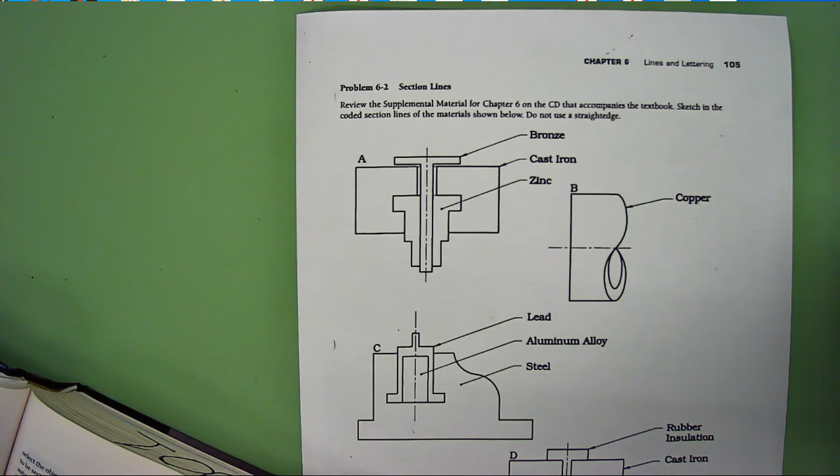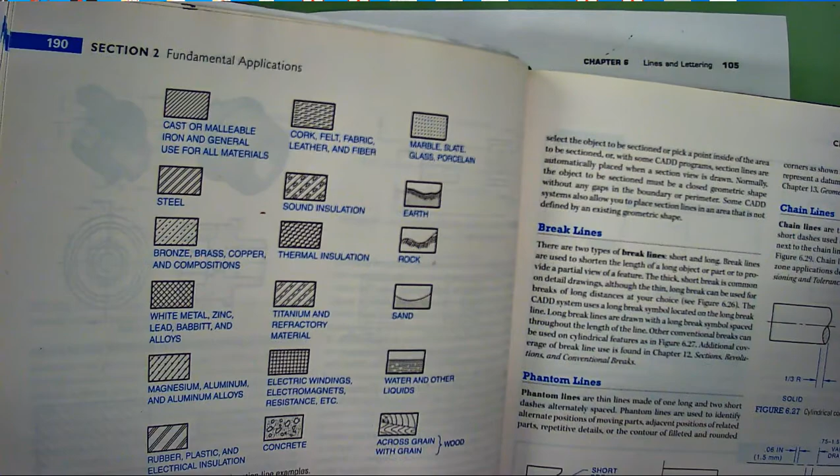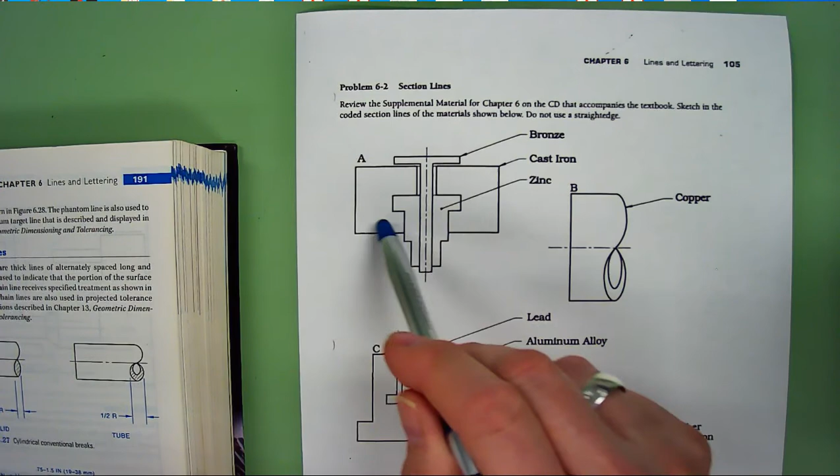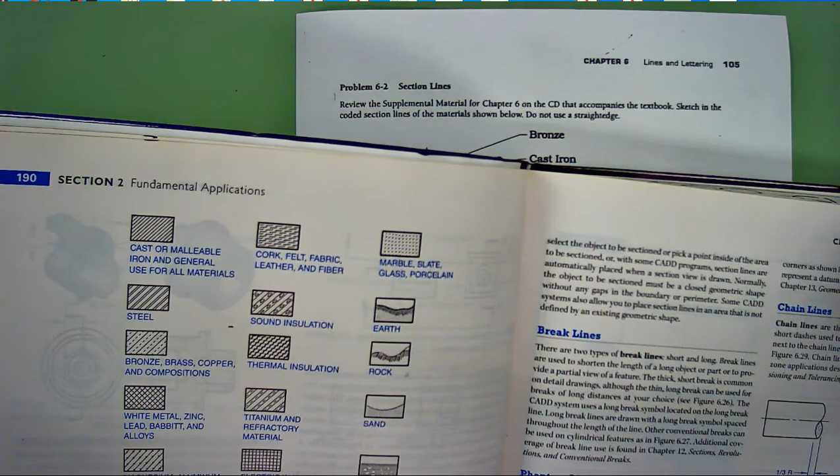Some have been confused. In the book, on page 190, here are your various types of hatching. The plan is for you guys to draw the specific hatches, like cast iron. See this area here, and this area right here, that's cast iron. So it should look like this very top one right there: cast or malleable iron, used for general use for all materials.

I'm going to keep this book handy, but I'm also going to show you the tools that you should be using for this.

Everyone should have a box of drawing tools, and for this assignment we are going to need your triangles. I'm going to set them up here for right now. We do have some spare pencils in here. This one's a 0.9, so that's pretty big, and this one is a 0.5. I'm going to use the 0.5.

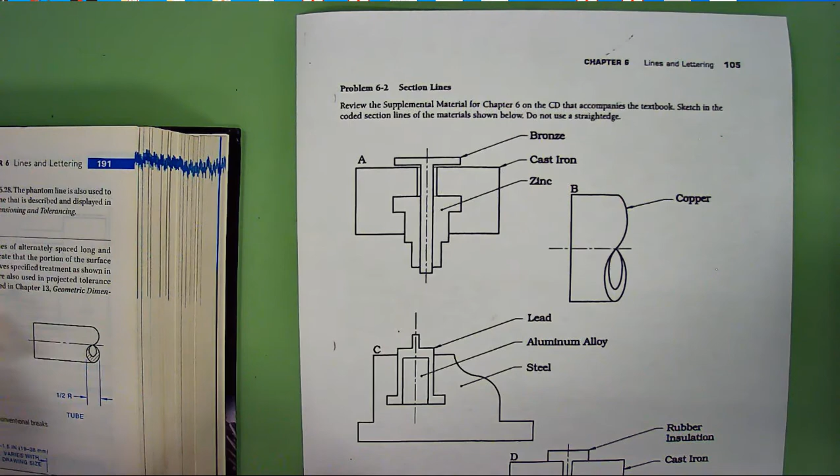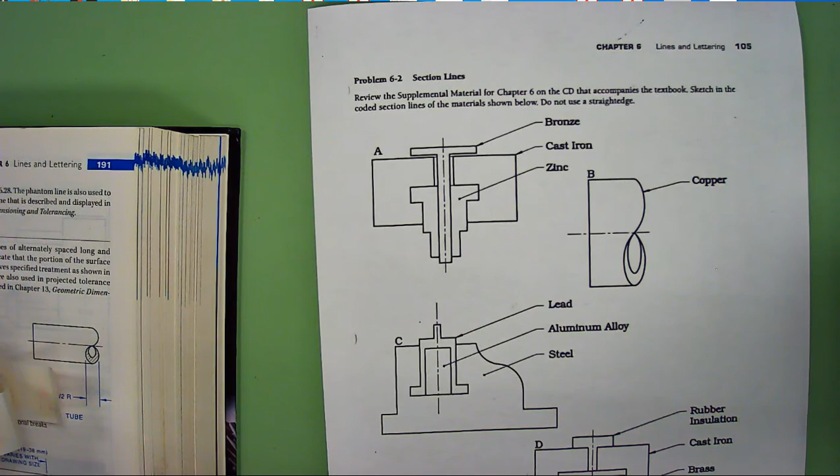I'm going to set this back up here. Actually, I'll set that over here so it's not in the way. Then I'm going to tack my paper down so I don't accidentally move it. Let me try to get it square with the screen, because it's not square on my desk. That's okay.

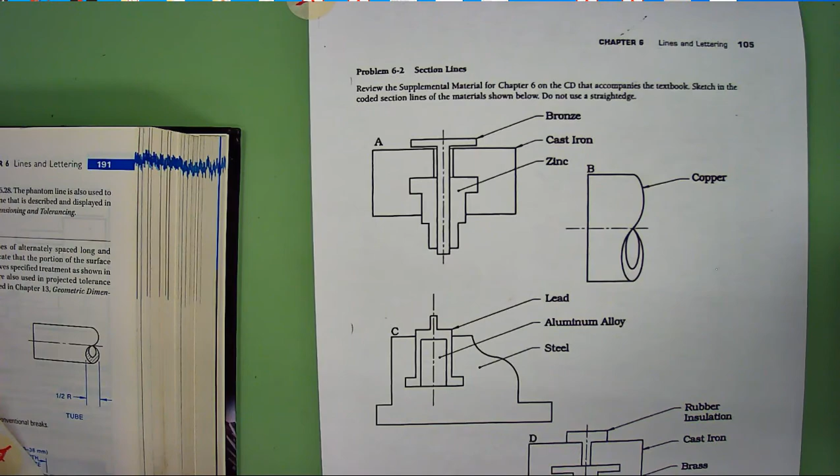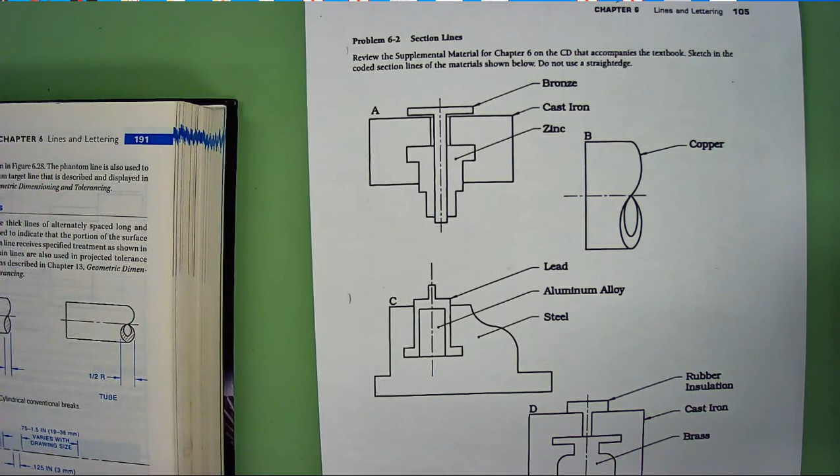So this is how your paper should be taped down, which you can't see either one of them. I'm going to move this for just a second. See, I got the corner done up there, and then way down yonder is the other one. The plan is to have it at all corners, but since this is just a demonstration, I'll put the book over here.

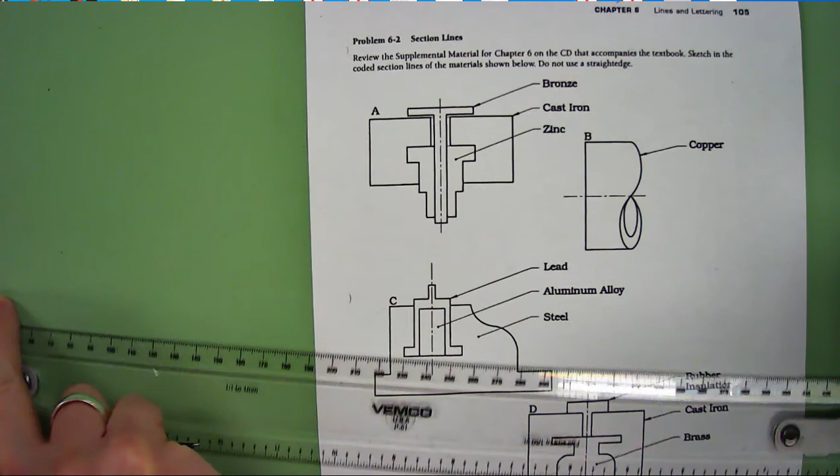Some of you probably have T-squares. This right here is a drafting machine. I'm going to level it up with the paper. That's close enough for government work.

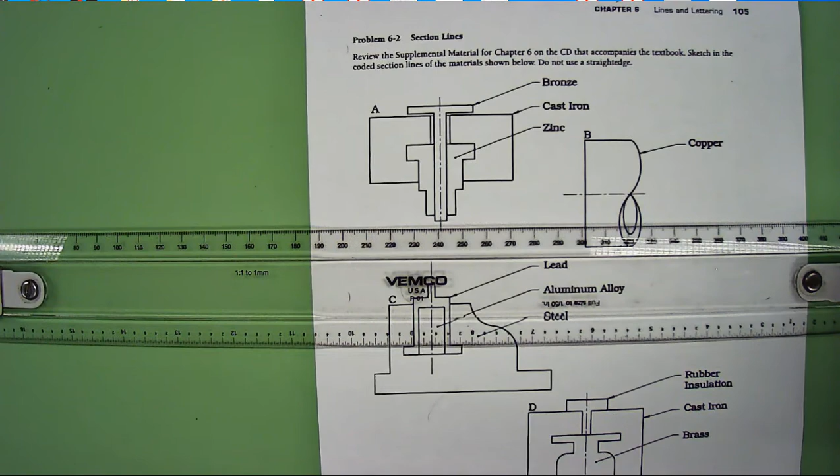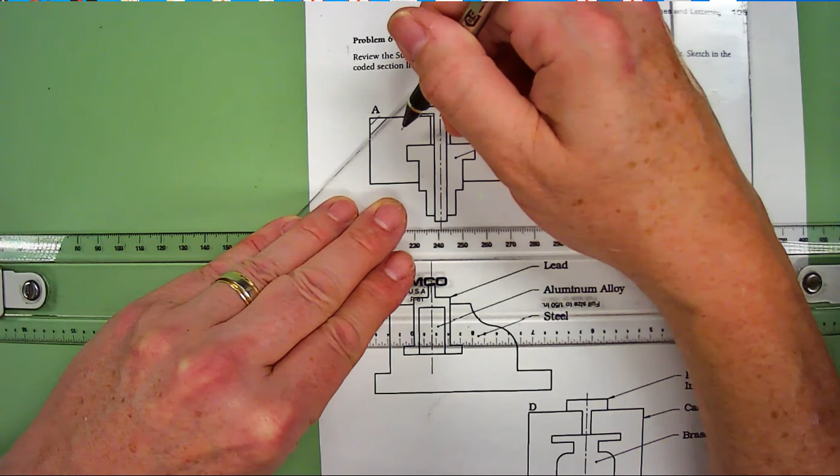Now, our cast iron lines are at a 45-degree angle, so I'm going to make lines. My head is usually closer to the hatching, but then I'd be hitting the camera.

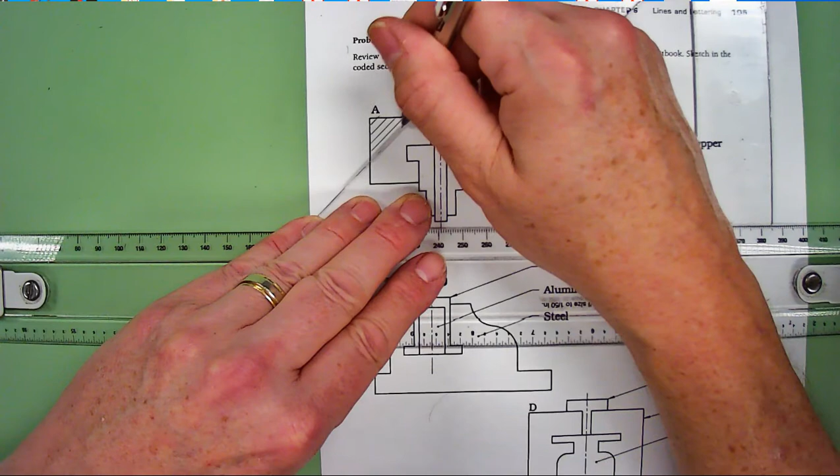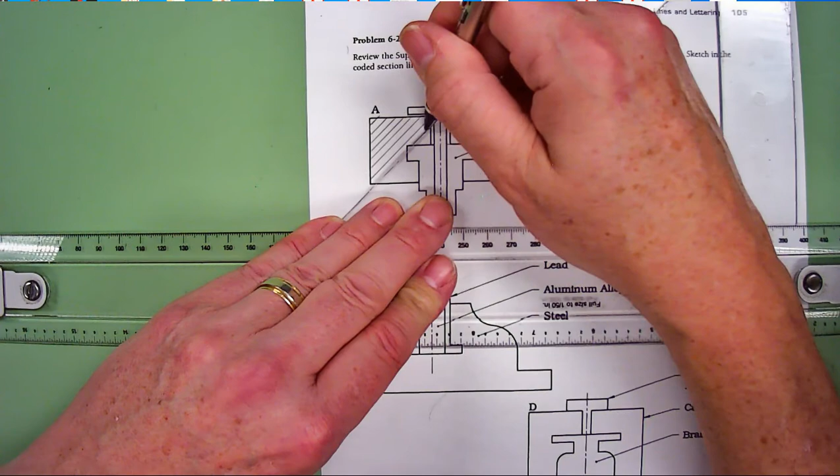And this is how hatching is done. Now, in a perfect world, I would have measured and made some starting lines. Oops, I let that get away from me.

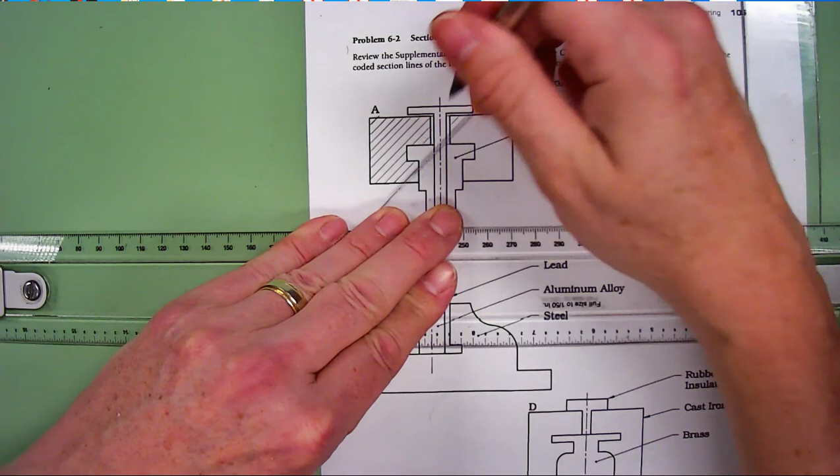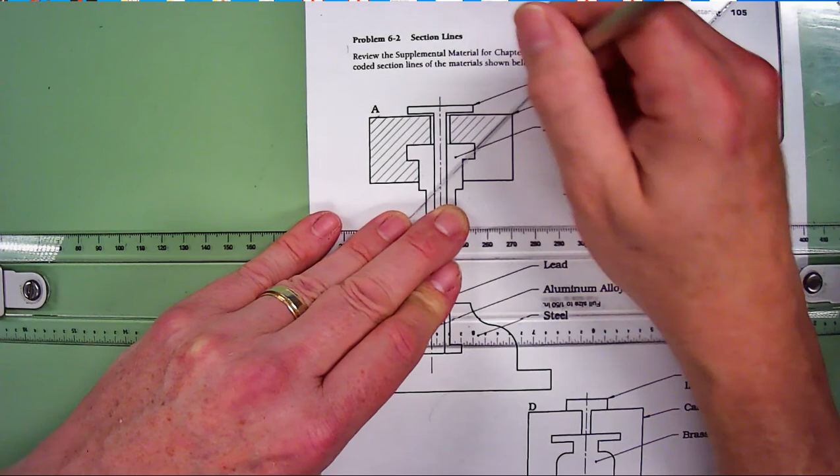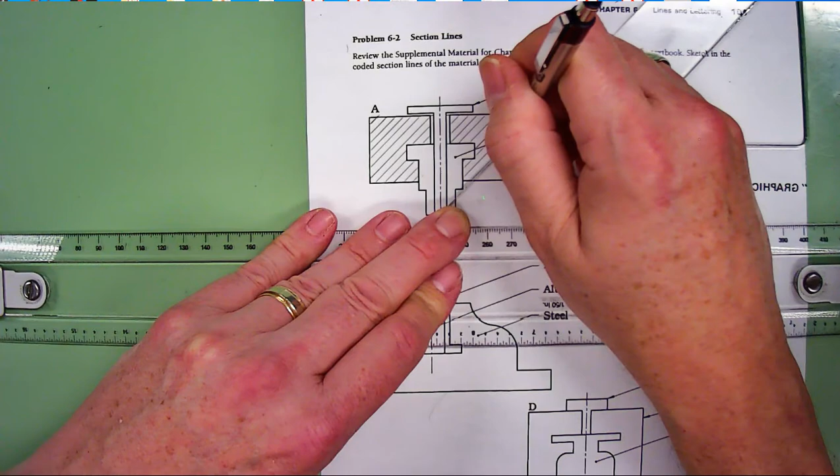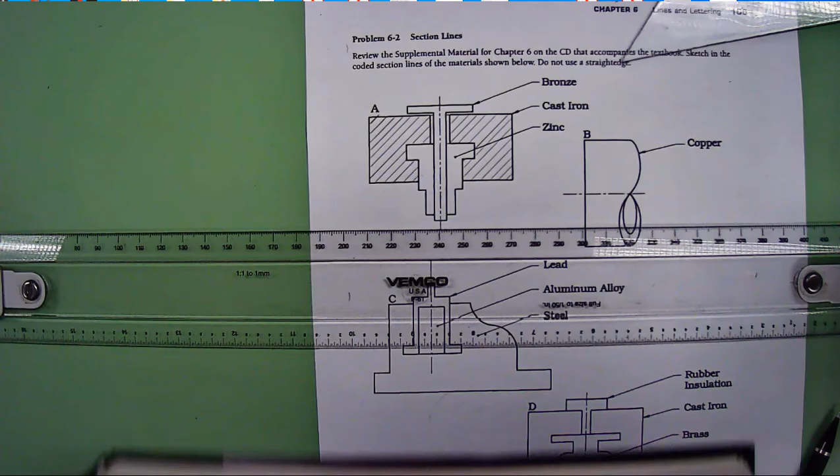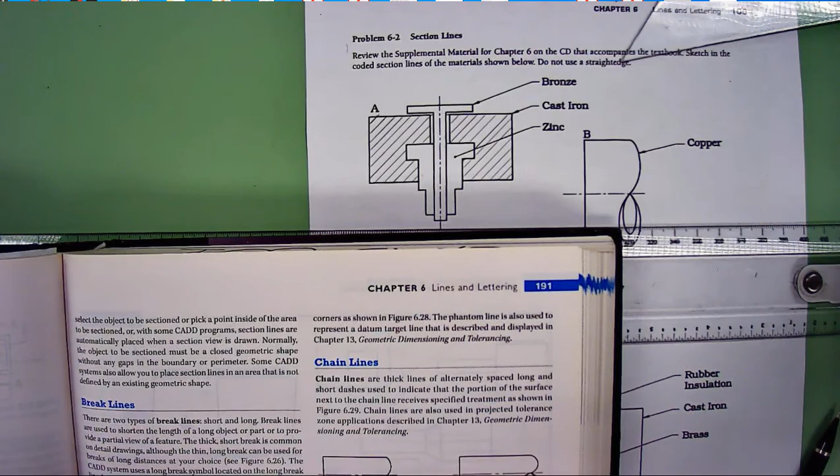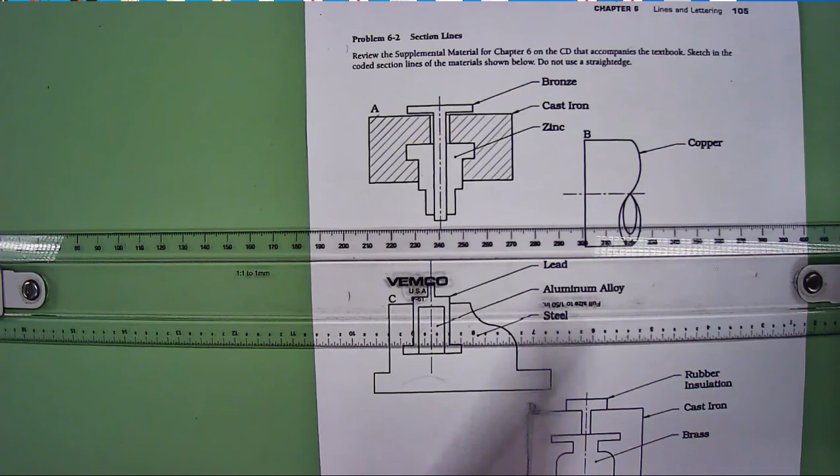I'm going to cover this one real quick because it's copper. That one is a line, then a dashed line, then a line and a dashed line. So for this, I'm going to use this one. I'm going to bring this down here.

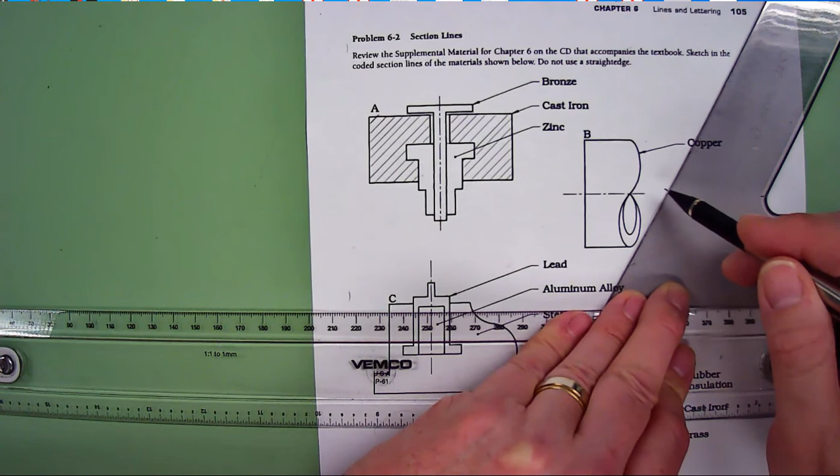But this one is different, because the only part that gets hatched on this is this C shape, since that's the only area that's cut. This is a tube — a copper tube. It's telling you that because there's a center line through it. You only use center lines when you have a tube or a hole. And since this is showing the figure 8, just trust me, there's a section over here that looks like an 8, but this would be the part that gets hatched.

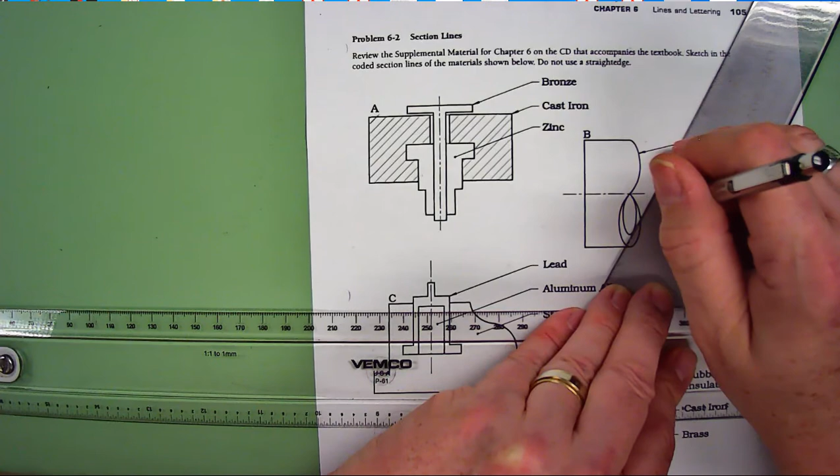So we're going to — okay, there's that, and then we go. Now, let me see, that needs to be right about there. So then we're going to go here and here. See that? And then we're going to make some very small dashes.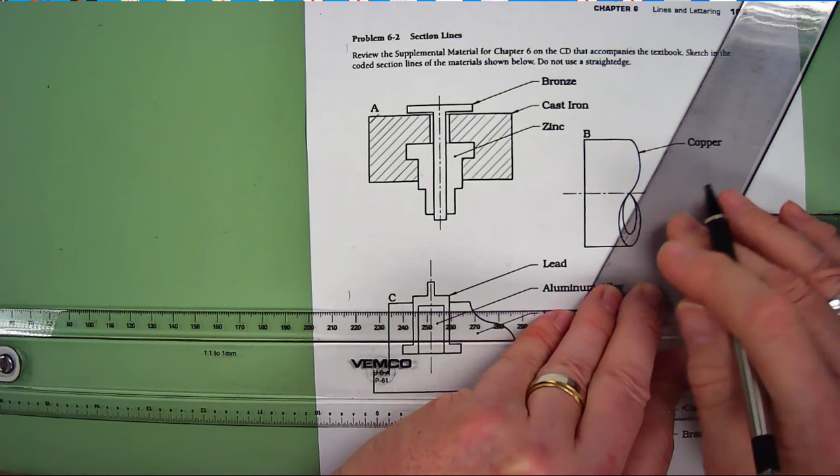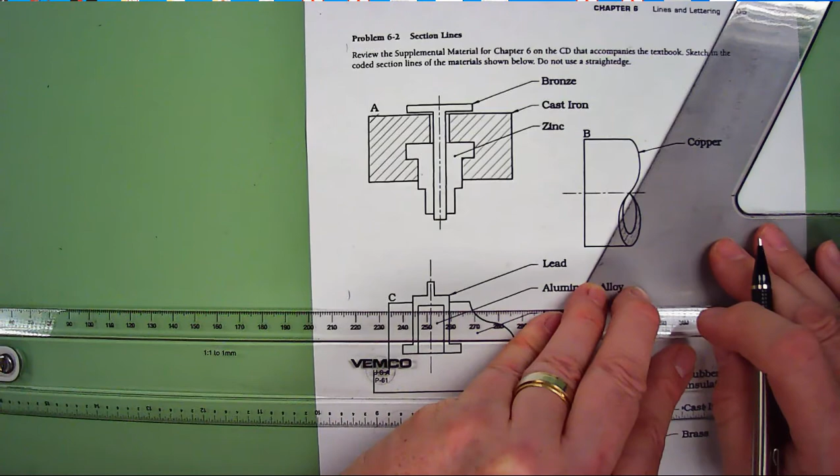And then solid line. Now I don't have anything left to draw on that part, so now we're going to have some very small dashes. You see that? And then one more line should do it, because when we move it up here, we don't have anything left. So that will be all that you hatch on that one.

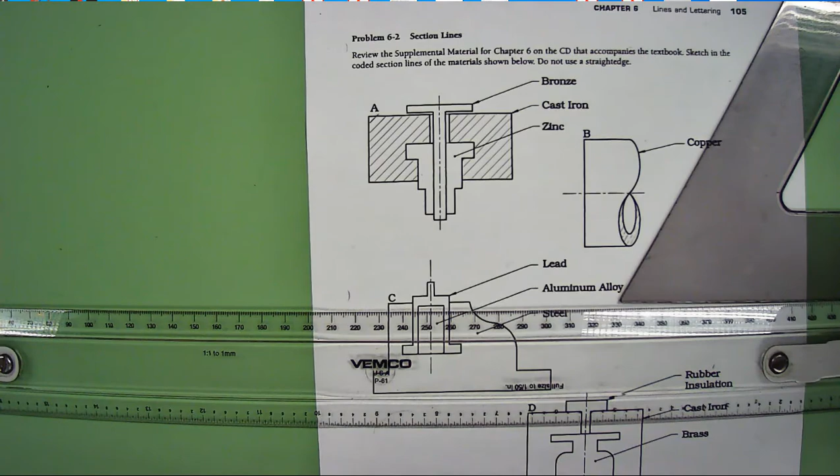Okay, so now that that's out of the way, I want to get back to the bronze. Bronze is the same as the copper, so that's going to be fairly easy right here.

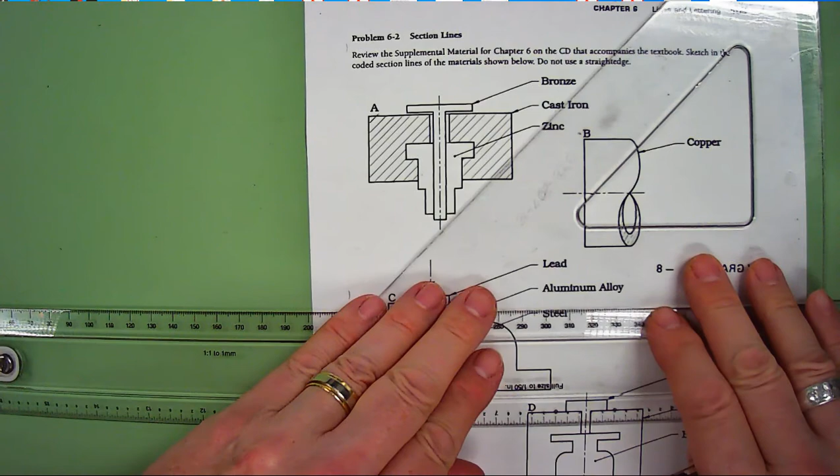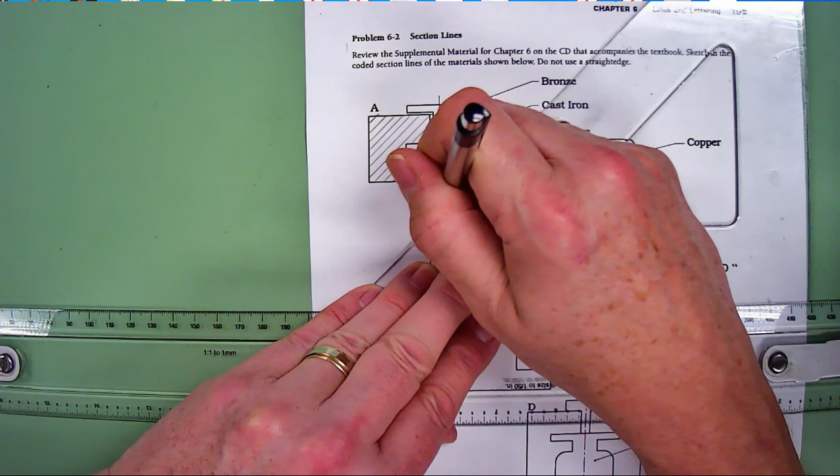Now I'm going to go back to my 45 instead of using my 60. Okay. And let's see, for bronze I'm going to start right here. And do this.

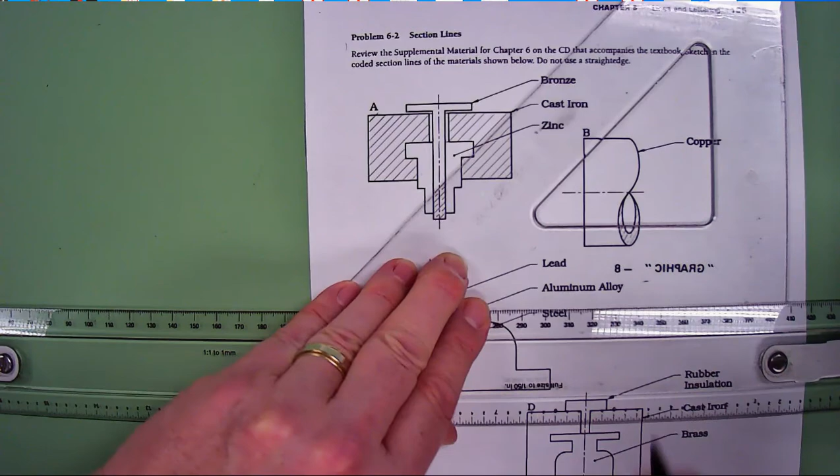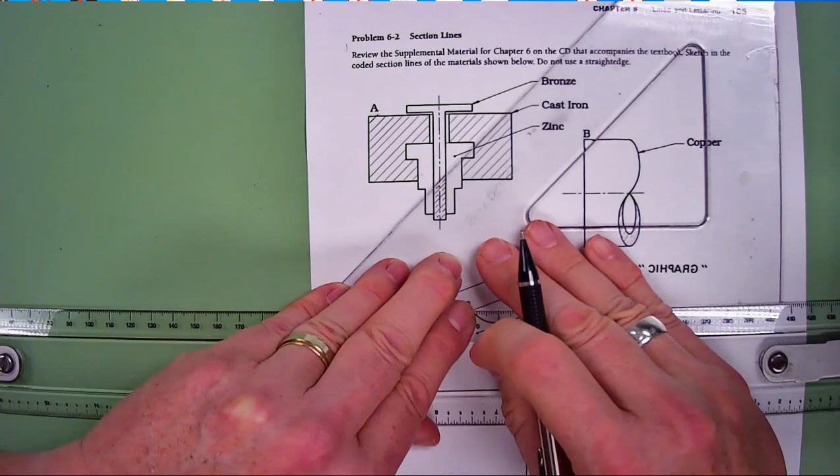Hatching and lettering are going to be the most time-consuming, but typically the most rewarding part of board drafting, because if you do it right and do it with precision, it's going to look outstanding.

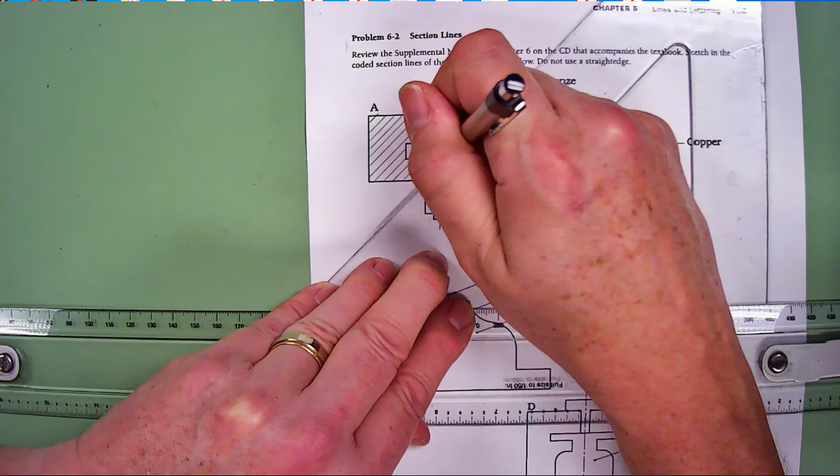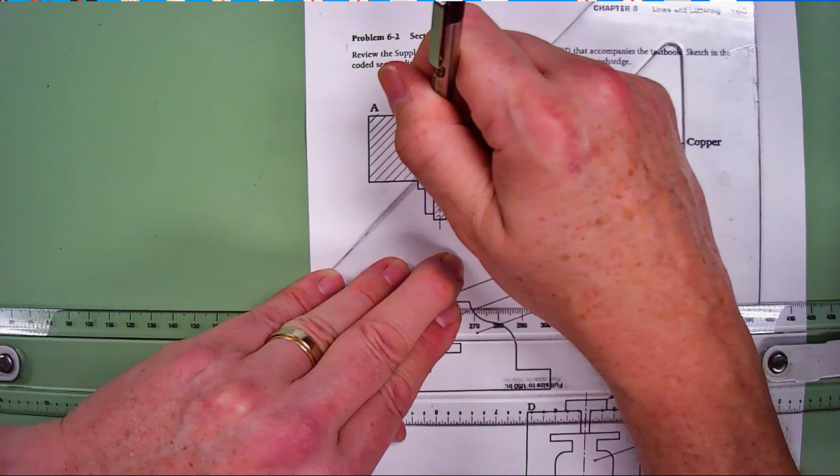Sorry I'm not saying a whole lot. I'm trying to concentrate on what I'm doing here. It has been a long time since I have physically done this.

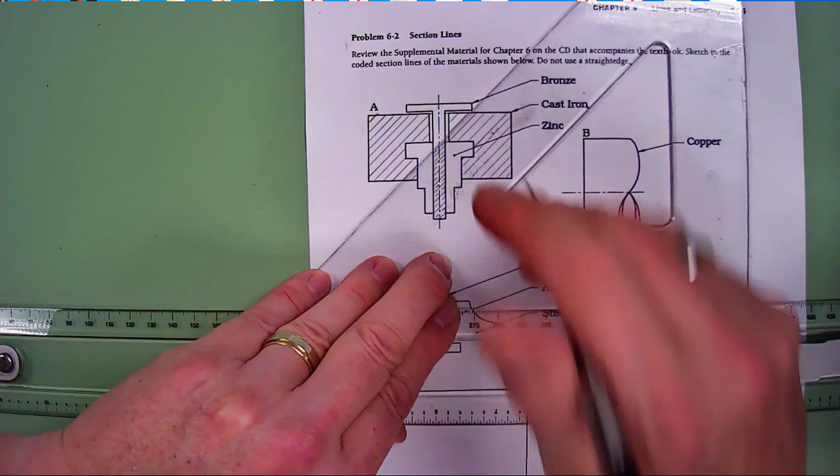And you see how it's looking?

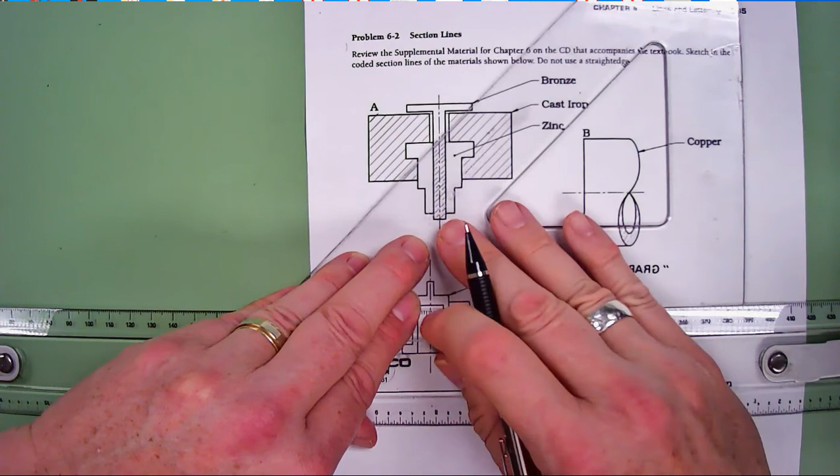So then when you start up there, you need to remember to do your dashes up there as well.

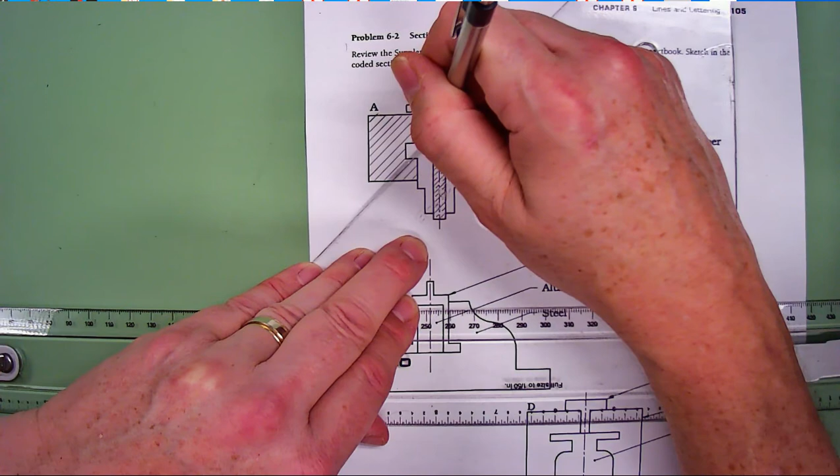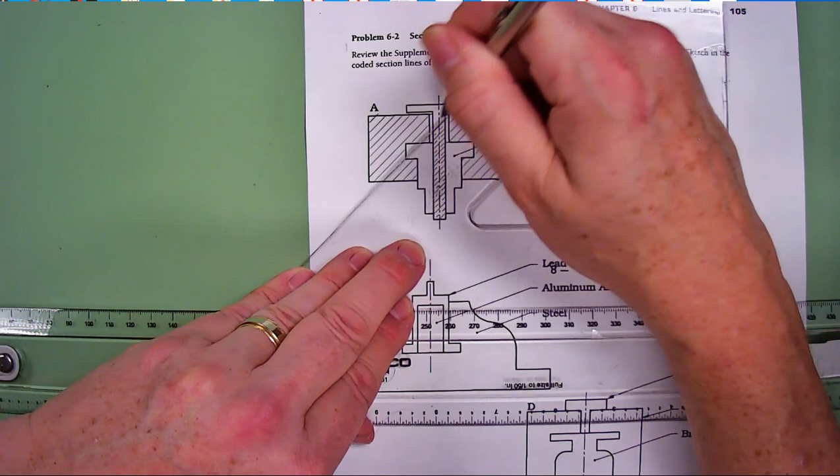If you make a mistake, you can always use your eraser shield, and that'll keep you from messing up anything else you have.

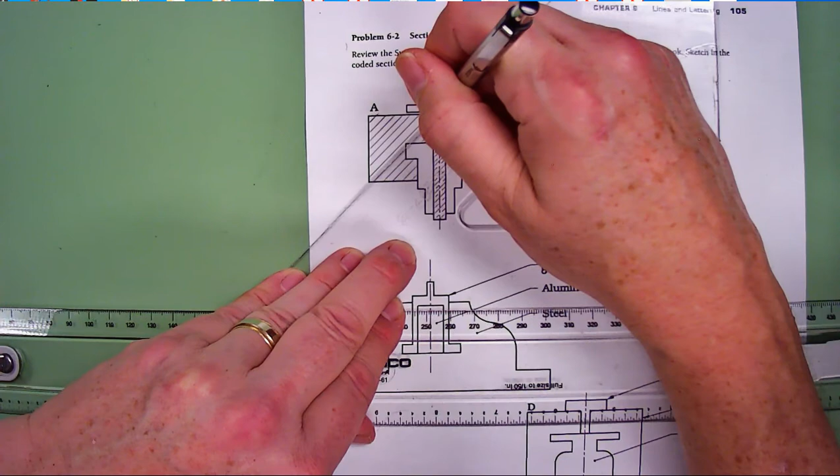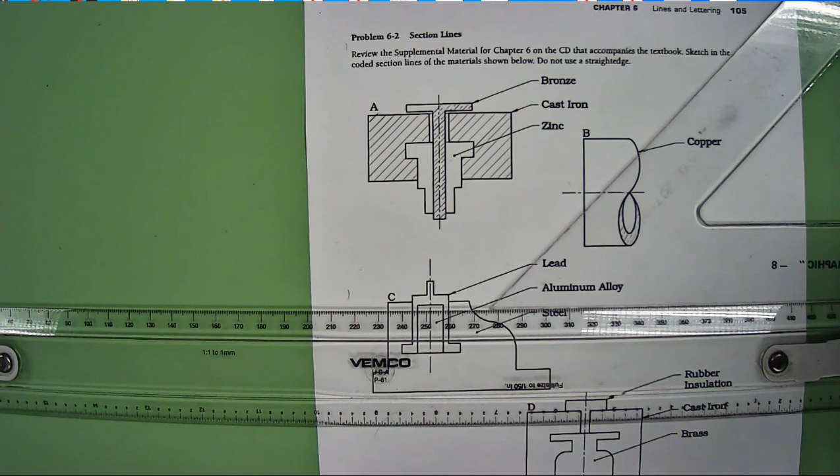I'm going to stop at that point right there because you get the idea, okay? And then for zinc, zinc is a crisscross.

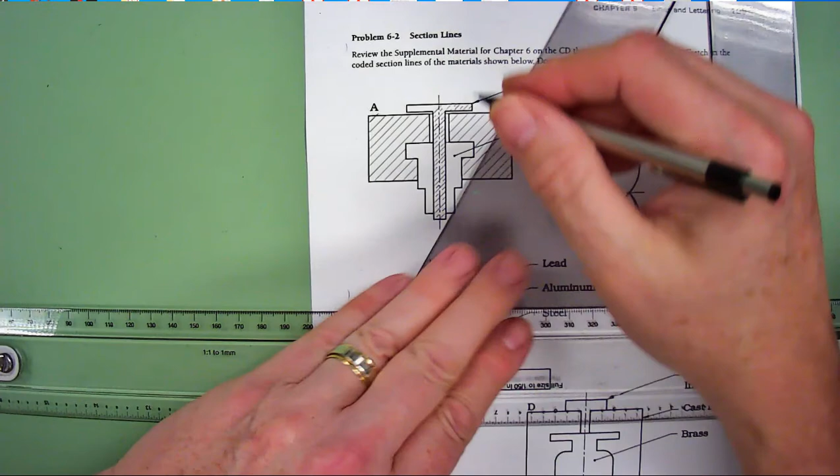So what we do, I'm going to, since we've got so many hatches of this one, and use it.

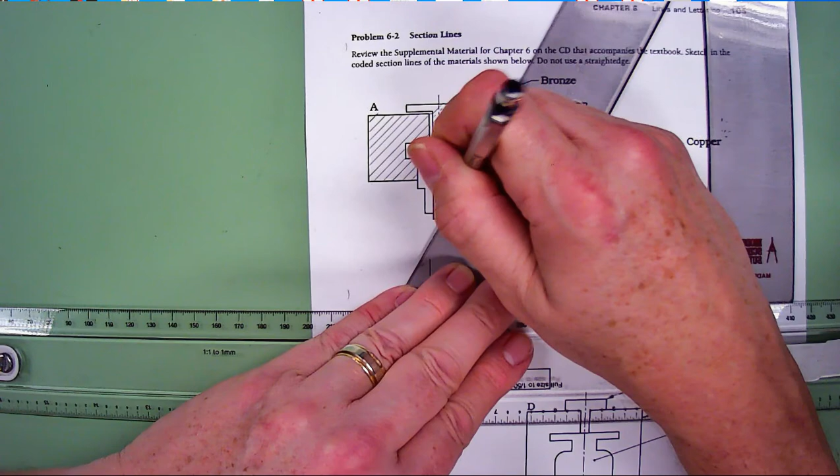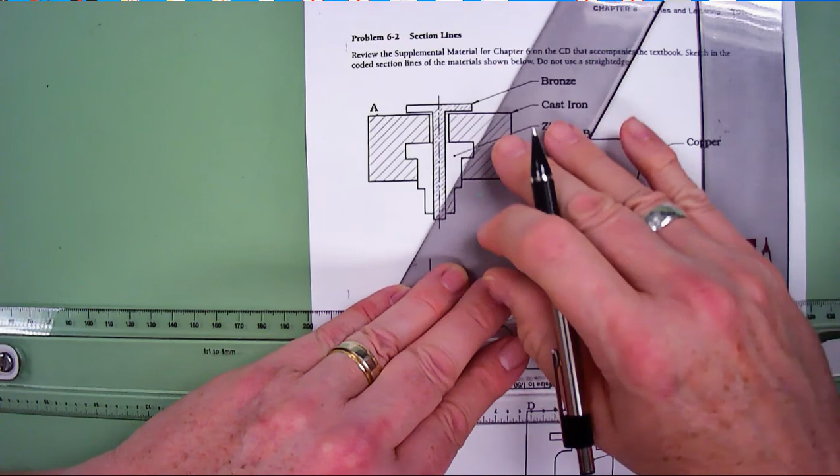Because you don't want your, oops, missed that guy. You don't want your hatching to be confusing with the other lines.

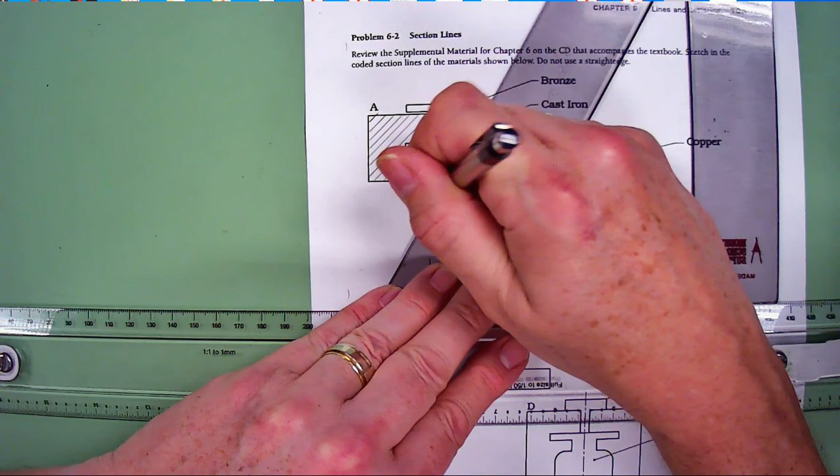And I'm only going to do to the top of the right side of this. I hope that's okay, because then that's when I flip my triangle and do the rest of the crisscross.

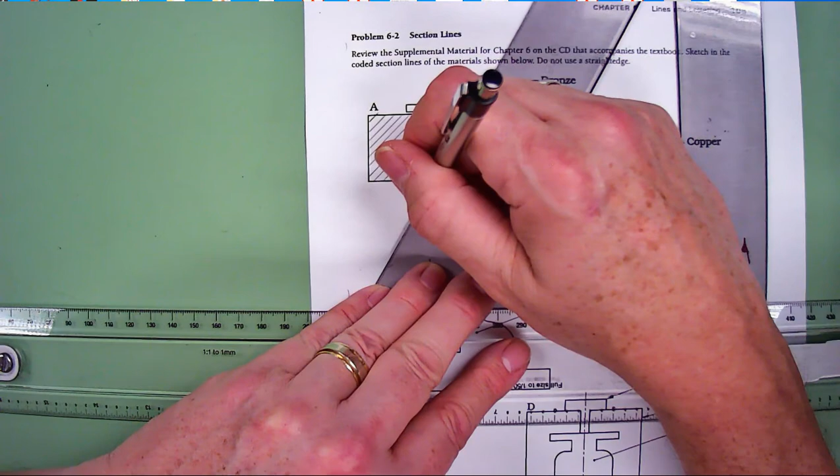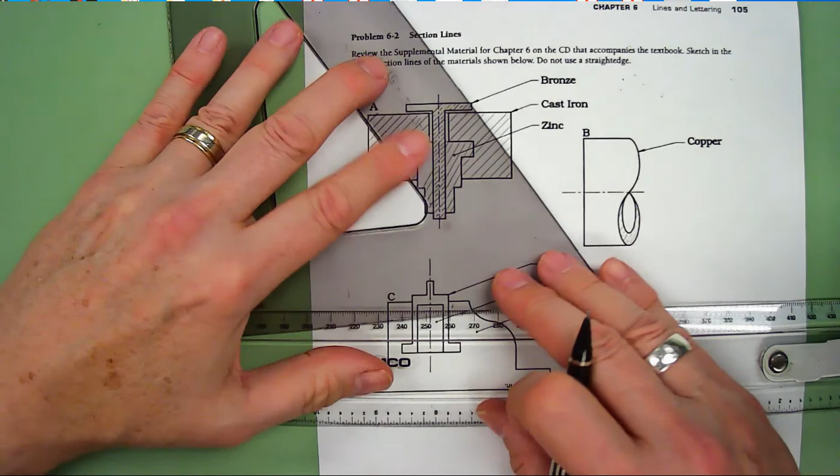So we just grab this guy and go back to this.

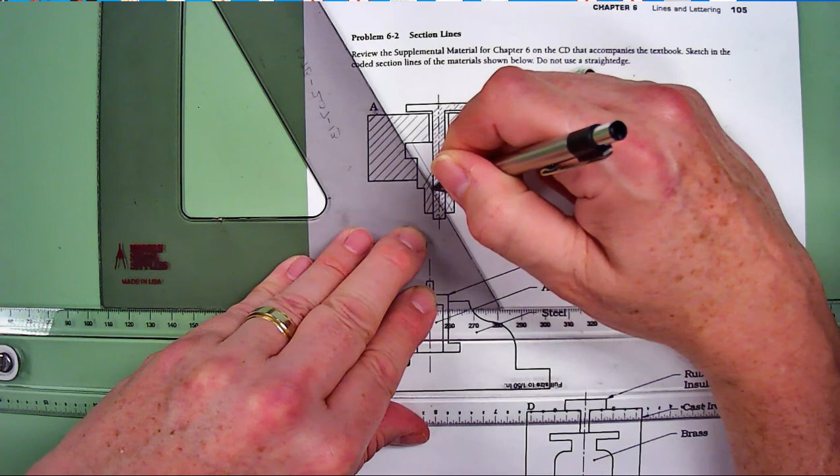And you see how those are? So that's how you differentiate the different metals in a drawing.

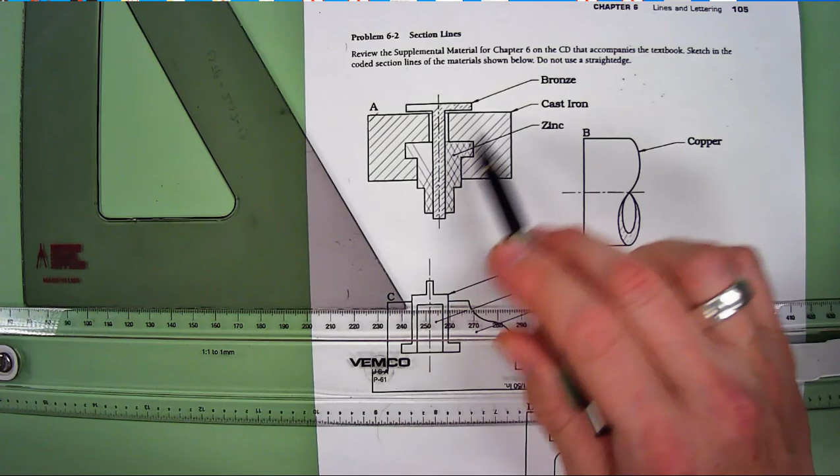Cast iron, and like I said, I should have measured those. And it's easy to do that if you will set up a series of marks, and they don't have to be dark, but if you want to set them up every, say...

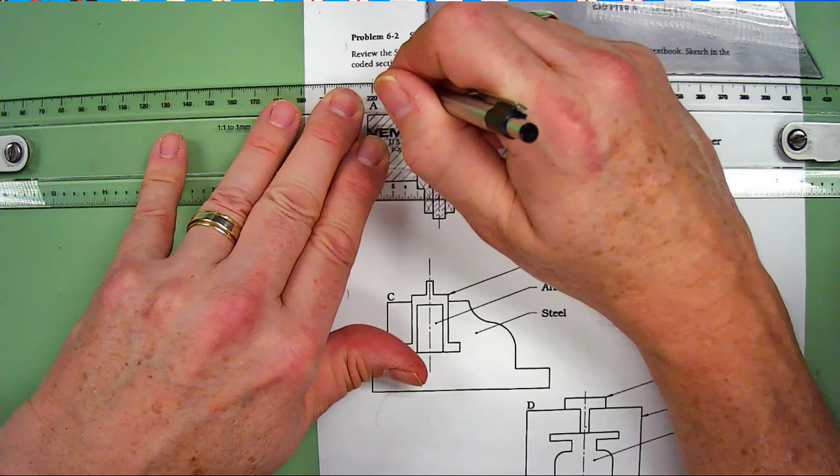Every 3 millimeters, see, that would cover, see the little lines I made? Can you see those? Because the idea is to make them faint and then erase them when you're done.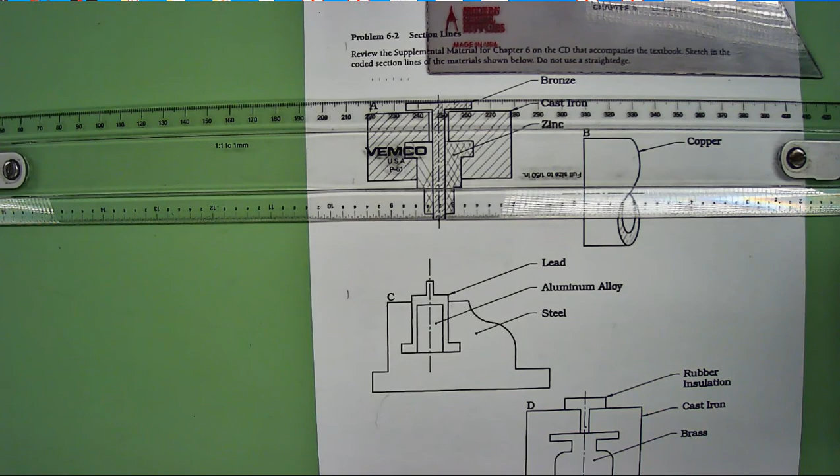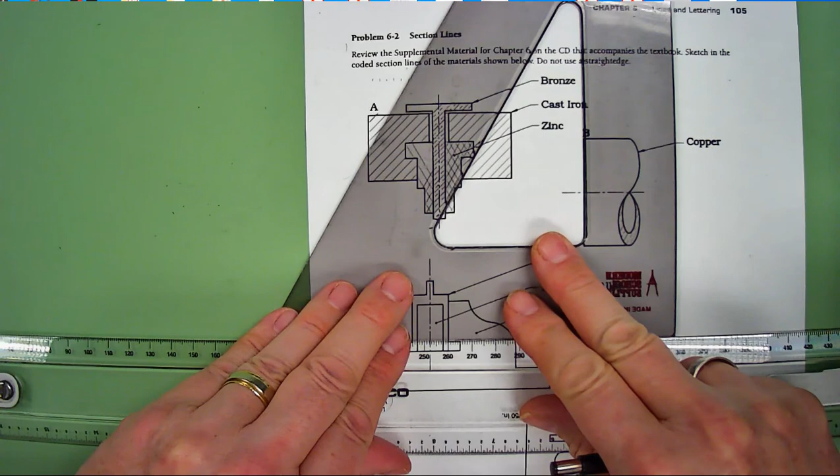Excuse me. And then you can use that to line up your triangle, okay, for wherever you're going to be putting the lines. And those lines can be used anywhere on your triangle. See, like I could put in a line here, and a line here, and a line here, and that would keep things all nice and even, kind of like how I was doing with the bronze and the copper, okay?

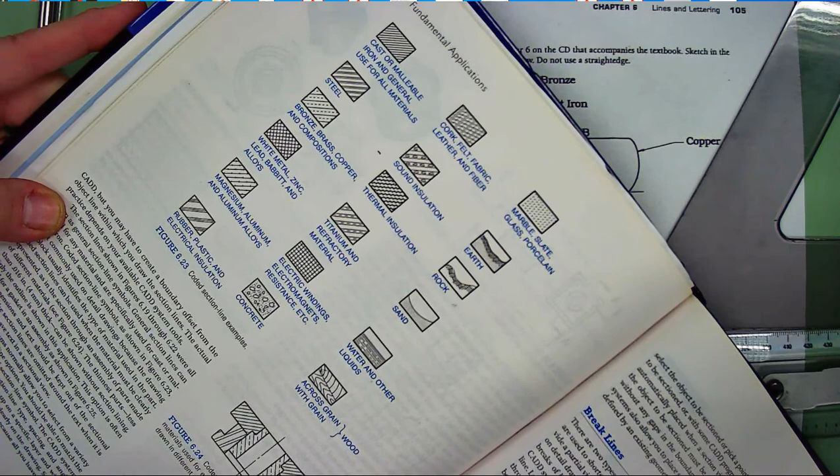So I hope that helps you out. I don't want to do all of it. I mean, it's fairly straightforward, but like I said, on page 190 in the textbook, there are all of your various metals and how they should look, and you know, you can use that as a reference guide. Okay, so let me know if you have any questions.